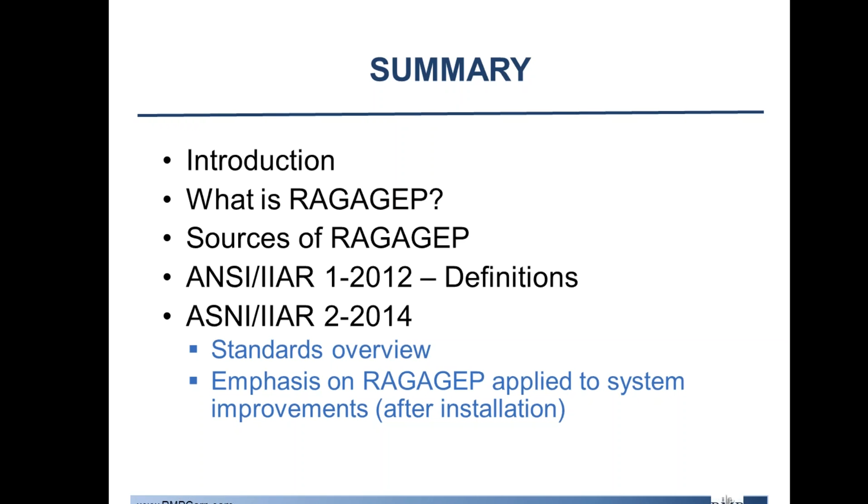There are 8 standards right now. Standard 6 is the only one not published. However, last couple days I checked, they're also going to publish a 9th standard that will be focused on RAGAGEP guidance. This is something that's new to my knowledge in the last couple months. That will help and balance out our discussions here and probably bring out what's really important for RAGAGEP for those existing facilities. Again, we're going to go through this whole thing. We're going to talk about it from a design standpoint, from start to finish, but we're going to try to focus on RAGAGEP a little bit, and it's a good way to just get a better idea of what might be missing at your facility.

So I just listed out the regulations that call out RAGAGEP: CalARP, RMP, and PSM. CCPS has a definition as well. They're, to my knowledge, the only group that has a definition for RAGAGEP. But I wanted to list these standards so that someone could reference these if need be. I won't go into the nitty-gritty, but every single standard out here is calling out the need for RAGAGEP at facilities.

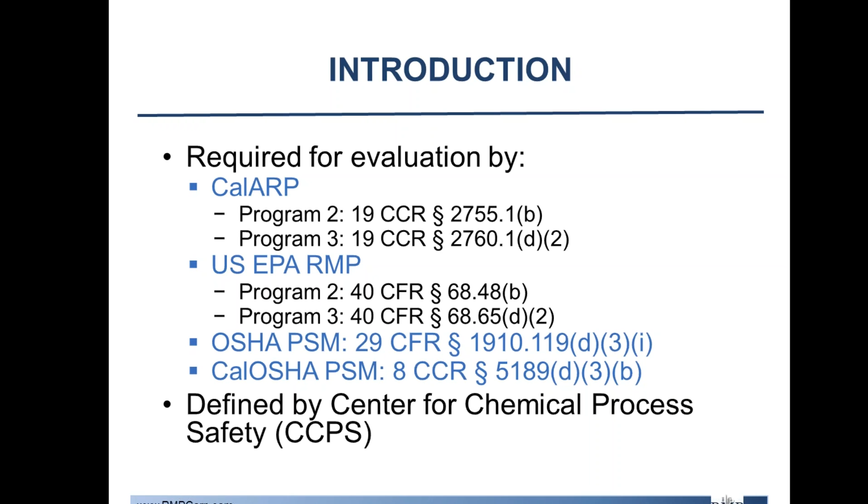RAGAGEP stands for Recognized and Generally Accepted Good Engineering Practices. It not only applies to the design of the system, but also practice and implementation at the facility and the safety culture that's there. There's a lot of segregation between the two sometimes, and it really shouldn't be. It's all-encompassing. It should apply every day, and it's a way to just have a safe practice at your facility.

I put the definition for CCPS here. I'm not going to read it, but again, it goes through everything from the design to practicing, maintenance activities, using codes to design your system appropriately. So it covers both sides of that same coin.

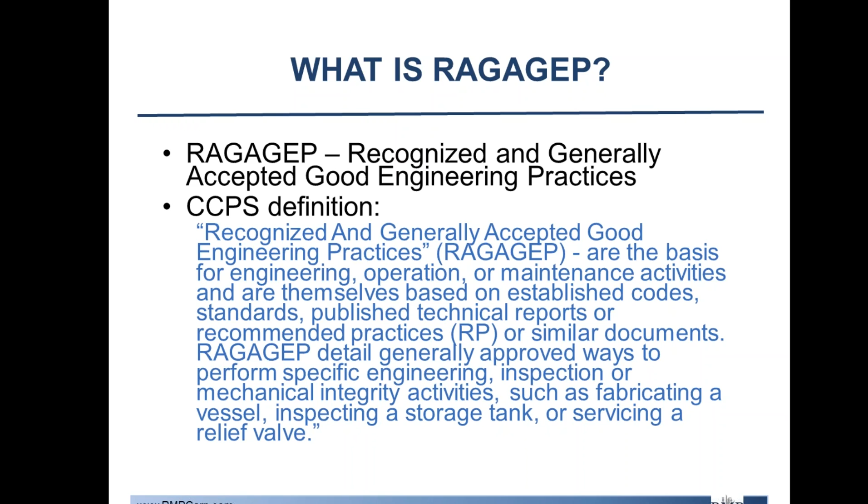For sources for RAGAGEP, they're basically published in accepted codes from federal, state, or municipal jurisdictions, like building codes, NFPA. Usually start at the local level and work your way up to federal, since local has better jurisdiction. Then you move on to the published consensus documents, and these are listed in the order that they should be used as far as authority. There are broader guidance manuals, but as requirements and guidance get more detailed, that's what really should be used.

So these published consensus documents come from organizations that are represented by committee membership. So IIAR is a perfect example, ASME, ANSI, RETA is another one that comes to mind. Any standards or guidance documents that are published, that's where these would fall into for organizations.

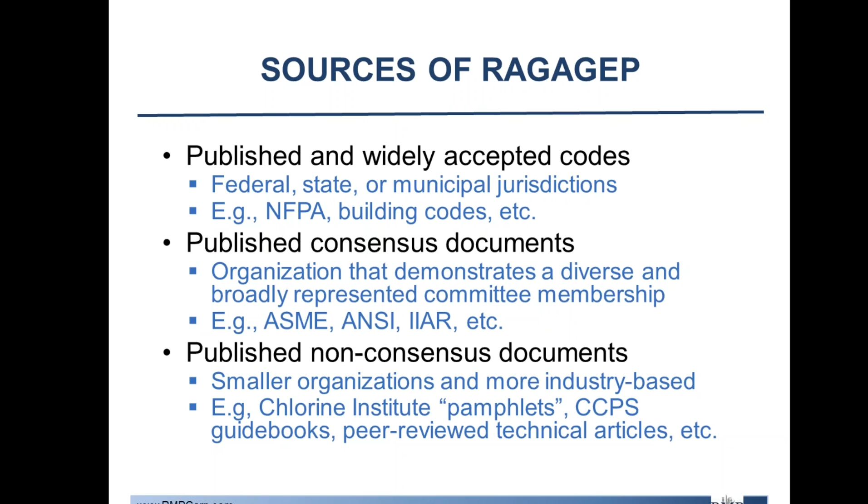And then there's non-consensus documents. So they're usually smaller organizations and more focused on a specific industry, like the Chlorine Institute pamphlets. CCPS publishes a number of guidebooks. Any kind of peer-reviewed technical articles might be like a case study or something from a larger company. Things like that bring in RAGAGEP and are important to keep track of.

So we're going to talk about ANSI IIAR 1 that was published in 2012. I'm only outlining the more important definitions. There is a full list of definitions in the standard. I encourage you to have that handy if you're looking through anything else for definitions. It's not really necessary to read through the whole thing just to know what the definitions are, but if you ever have any questions about how something's defined, that's where you're going to find it.

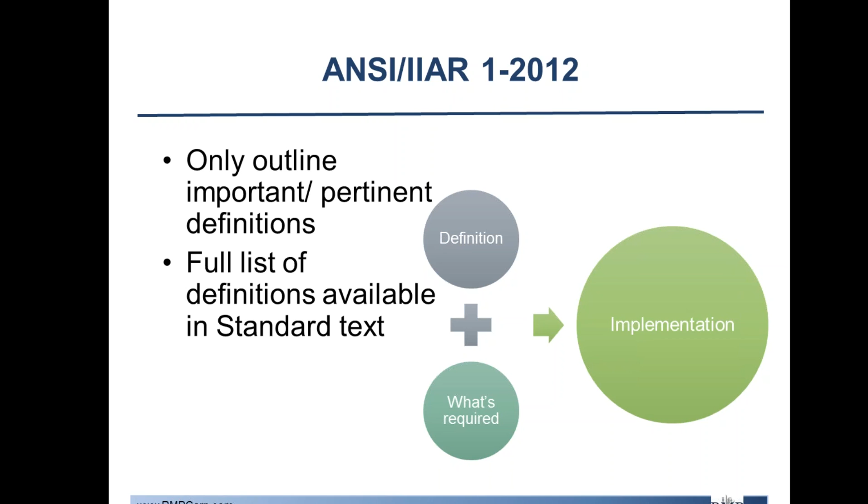It should be expected that all the definitions will move into this first part. Each of the standards still has their own definition section at the beginning. However, it looks like they're going to start moving everything to one section, the section 1, and remove the definitions from the rest of the documents. So this will be your place to go to. This is your dictionary for the standards. So we're going to take the definition, we're going to take what's required, and in this whole process, we're going to talk about how you implement all of this.

So emergency operating procedures are intended to be used under abnormal, unintended, or time-sensitive conditions. They may involve risk to health, the welfare of operators, employees, or the public, and include any of the components of the refrigeration system, or may include hazards of the product. So it's important to remember that the emergency part of that goes broader than just immediate need. It's really talking about the hazard and the fact that it's a very large hazard across a broad spectrum of things that can happen.

Machinery room is defined as an enclosed space that houses equipment. That includes compressors, pumps, liquid transfer equipment, equipment that raises the pressure of the refrigerant. And again, this is all defined in the first standard, Standard 1.

One really important definition is monitored. This is something that can be interpreted different ways, and so they've really spent time to define it, and also I have a little bit to add on to that. But monitored is a means of continual oversight, such as notification to on-site staff, third-party alarm service, or a responsible party. This means that an auto dial or a pager number may not be enough to be a monitored number.

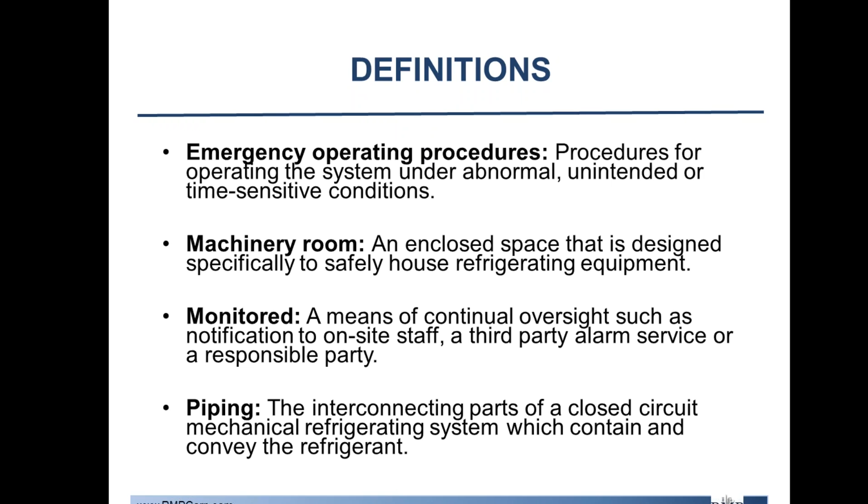Piping is referred to as interconnecting parts between the equipment and in the system. Pipes, flanges, bolting, gaskets, valves, fittings, you name it, it's there. So anything that's not what you consider your big pieces of equipment is considered piping.

Okay. Okay, we have some additional information from Tony Lundell. So the title for the Standard 9 I was discussing a little bit ago may change to application of RAGAGEP or to sustain RAGAGEP, sounds like. So they are still under a working title. That information is available on the IIAR website, but it is important to note they are still working on it and going through it. I believe it's going to go for public comment soon, so that's something to keep in mind, and thank you for that information.

So going back to definitions for readily accessible, basically that means that you have to be able to access the equipment without the assistance of some kind of access equipment, so like a ladder or something like that, and you cannot require someone to like climb over something or have an obstacle in the way.

So readily accessible really means that you can just kind of get at the equipment, whether it's a control box or a compressor, whatever it is, nothing can be in the way, no ladders. If it's a built-in ladder that can get up to a loft-type area, that is deemed acceptable. But not anything portable that you need to move around. So when the standard says that something needs to be readily accessible, that's really what they're referring to, is that nothing is in the way. It's ready to go.

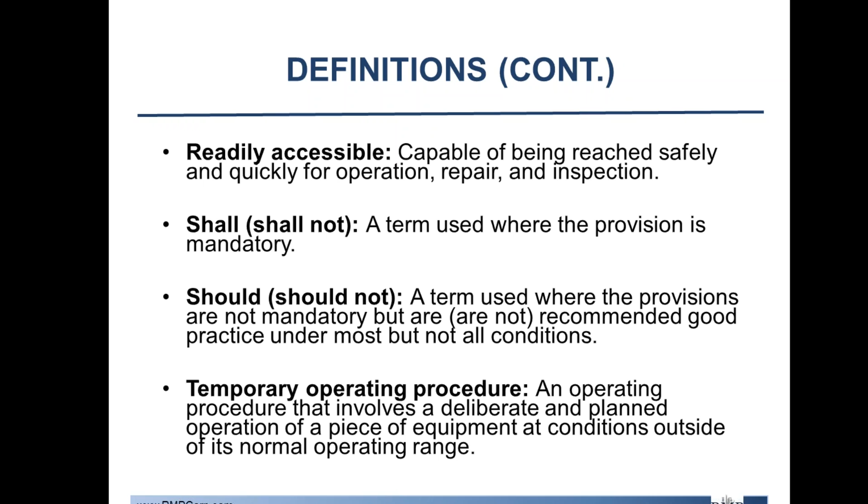Excuse me. I also want to call out the difference between a trained startup technician and a trained technician. It is possible to have someone trained in both. However, it's very important to realize that a startup technician may not be qualified, or a regular technician may not be qualified as a startup technician if they're not trained appropriately.

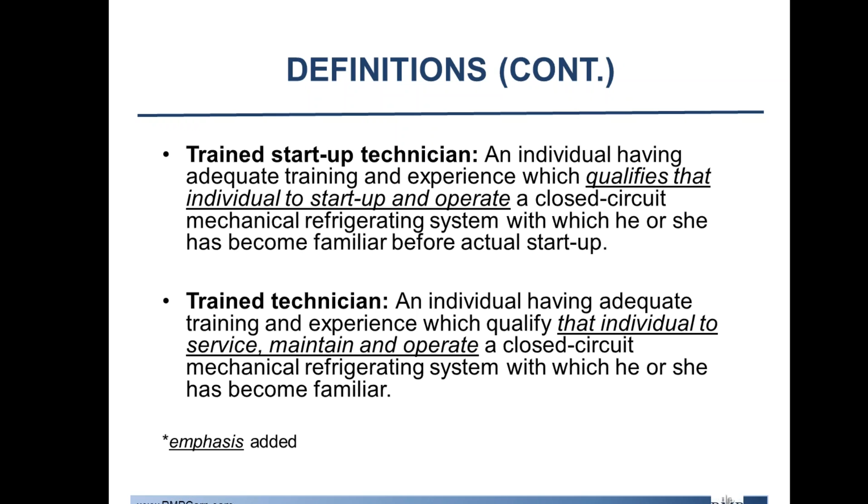The standard calls these out specifically for a reason, so to avoid confusion. And again, it's possible that someone could be trained in both, but it's important that if you have a startup technician and a maintenance technician, they're both trained appropriately. So we'll move on. Those are the important definitions from Standard 1.

Standard 2, again, I'm going through Chapter 5. The new things to note about this standard is that Chapter 2 of Standard 2 has fewer definitions than the previous edition. Again, this is going back to them moving the definitions from the individual standards into Standard 1 and having a definition standard.

Chapter 4 is new for this edition that was published, and Chapter 5 was updated for new design standards and best practice. Again, that's why I wanted to go through it. I'm not really sure the numbers as far as how many new systems are being designed. However, those same principles and applications can be applied to new equipment, upgrades to systems, or if you're just in general missing something that may be easy to fix or replace.

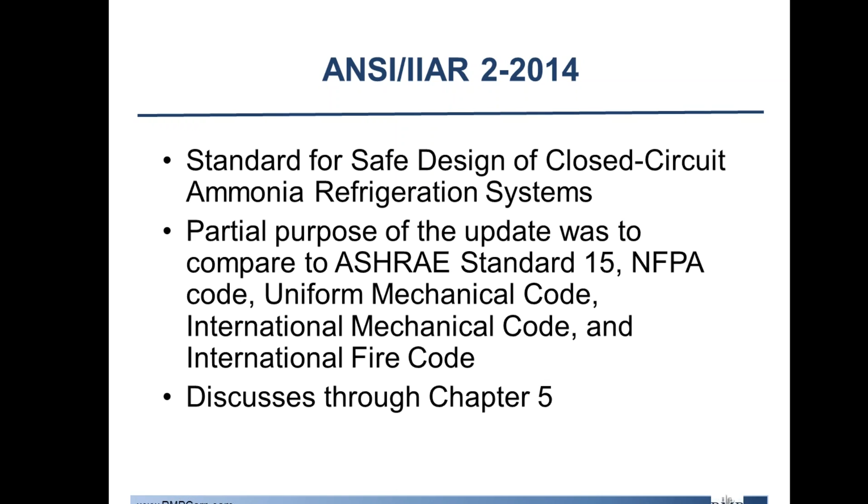So Standard 2 is designed for safe design of closed-circuit ammonia refrigeration systems. The partial purpose was to update compared to ASHRAE Standard 15 to meet NFPA codes, the Uniform Mechanical Code, and the International Mechanical and Fire Code. So to be able to integrate all of those codes together and meet all the standards. And again, we discussed through Chapter 5 on this one.

So what's new? This was published in 2014. They are now referring to these as standards. Again, like what I said probably about 10 minutes ago, the bulletins are kind of being phased out and these standards are being put in place. Both are still on the table, but the information from the bulletins is now being put into these standards and then developed and updated appropriately.

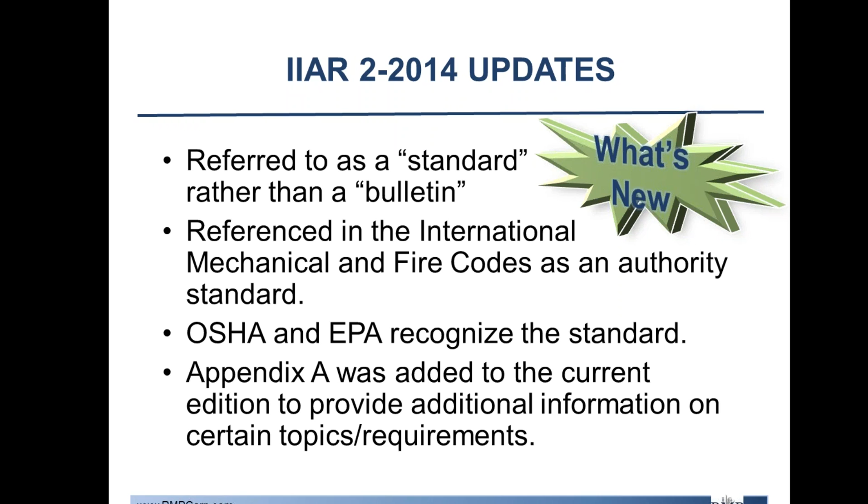These standards are referenced in the International Mechanical and Fire Codes as the authority standard. They are referenced in OSHA and EPA as a standard. And Appendix A also provides more information in Standard 2 for certain topics. In the standard, those topics have an asterisk next to them, and then there's a whole bunch of explanation in the back, usually referring to calculations or when there may be some interpretations needed. The EPA enforcement alert from February 2015 also refers to the IIAR updates as the industry standard.

Again, like I said, Chapter 2 has some definitions. I want to cover a couple of those. Most of them are moving into that first standard. And I'm skipping Chapters 1 and 3 because they're really just general information about the standard and some background information. There wasn't really much there that I felt was pertinent for this discussion. They are available to read and look at if you need to.

So Chapter 2 defines authorized personnel as someone who has been specifically granted permission to enter a restricted area. And it's important to remember that there are discussions based on someone who's authorized to enter a restricted area, and that's where this definition really comes into place. You can't just have anyone, even at the facility or off the street, coming into your facility and just walking in the machine room doing whatever they want. To be able to lock these doors, put the correct signage on things, that's where the standard is kind of going, and this is one of the definitions that's really important for that.

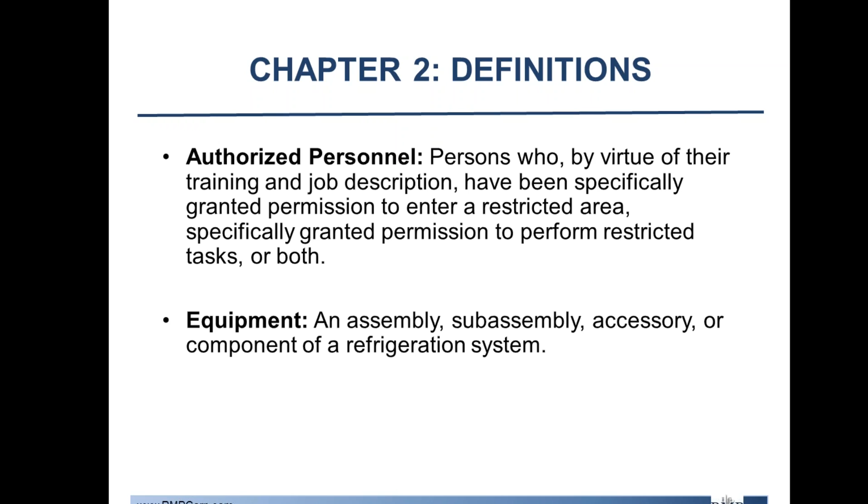And equipment, I just want to bring that up, is an assembly, a sub-assembly, an accessory, or component of the refrigeration system. So any part of the system is considered equipment. A package system is a prefabricated or pre-assembled closed-circuit system. It should contain all essential equipment, piping, and devices that are needed to run that piece of equipment. It could be enclosed or unenclosed, but again, they've defined this in the standard to make sure that everyone understands what a package system means by the standard.

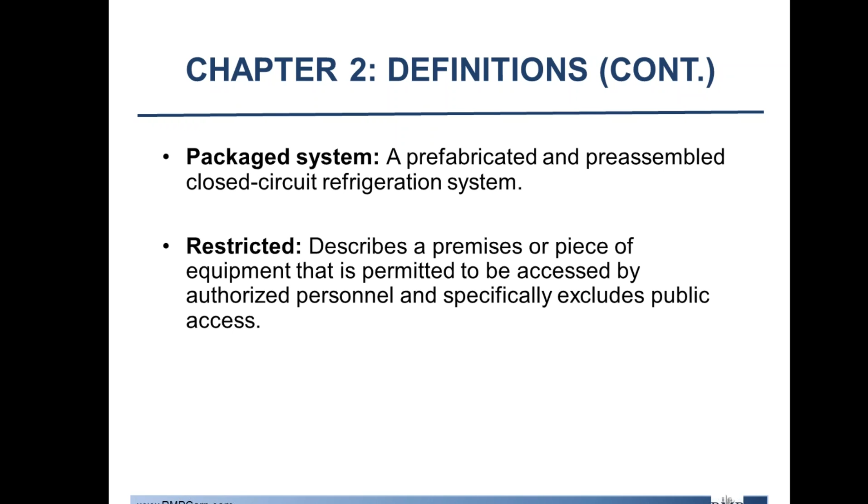Again, going back to authorized personnel, the restricted definition describes an area that is permitted to be accessed by authorized personnel only. So not public access; it's usually a locked or alarmed door, requires special access by key code or a key fob tag or whatever it is, more security. And that's really what they're emphasizing, that additional security for pertinent equipment that could cause a lot of damage or a lot of hazard at a facility for someone who may not know what's going on.

Like I mentioned before, Chapter 4 is new, so I'll spend a little bit more time on this in these next couple slides. Chapter 4, for the location of the machinery, basically all the locations should comply with Chapter 4 as far as locating machinery, which also carries into complying with Chapter 6. Chapter 6, which we won't go through today, but I'll give you a brief overview, goes through many pieces of equipment and where the locations for specific equipment are. So you're talking about compressors or evaporators, pumps, things like that.

So unless it's exempt by 4.2, which we'll go through in the next little bit, you must comply with Chapter 6. And again, we'll get to that in the next part of this series. So this should be kept in mind for equipment upgrades, that some equipment can be housed outside the building. And they do give you some standards for that, and that's going into Section 4.2.

That equipment includes evaporators, condensers, low probability pumps, valves, and compressors that do not exceed 100 horsepower. So if you have a low horsepower piece of equipment, you can put it outside for an industrial occupancy.

For a public assembly, commercial, or mercantile occupancy, you can allow for machinery outside if the complete discharge of ammonia will not exceed 300 ppm. So if you have a relatively small system that, even if you discharge the entire volume from whatever piece of equipment we want to locate outside, has a target concentration less than 300 ppm, you can locate that outside, given you meet the occupancy categorization here as well.

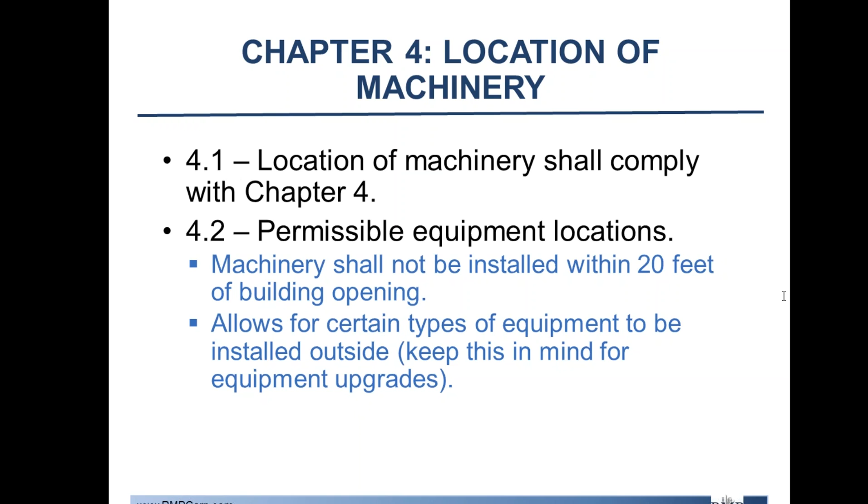With those exceptions, if there's equipment outside, they cannot be installed within 20 feet of a building opening. And again, we went through certain types of equipment outside. So for smaller systems, maybe upgrading to fewer pieces of equipment, downsizing a facility, building a new facility that may be a little smaller, these are things to keep in mind: there's some equipment that can be located outside, maybe saving you some room inside for a facility and warehousing.

Chapter 5, the general system design requirements, is going to be the rest of our discussion. We're going through Chapter 5, and we'll stop there. It's plenty of information for this morning. I'm hoping you all had your coffee, because it'll take us a little bit to go through. I'm going through this basically section by section. I'll cruise through some of the easier sections, or ones where you just have to look up the information in the standard. Other ones I'll spend a little more time on.

So section 5.1 is just talking about how the ammonia refrigeration system has to comply with this chapter. Section 5.2 talks about the specifications for ammonia. So it talks about purity, quality of ammonia, and what's required to use in a closed circuit system.

Section 5.3 is discussing calculating the concentration for ammonia release. The additional subsections, 5.3.1 through 5.3.4, talk about guidance on wall openings, suspended ceilings, interconnected floors, and ventilation considerations. And if I remember correctly, this is also a section marked with an asterisk. There's more information in Appendix A. So if you're doing these calculations, or if you want to verify any calculations, this is where you want to go.

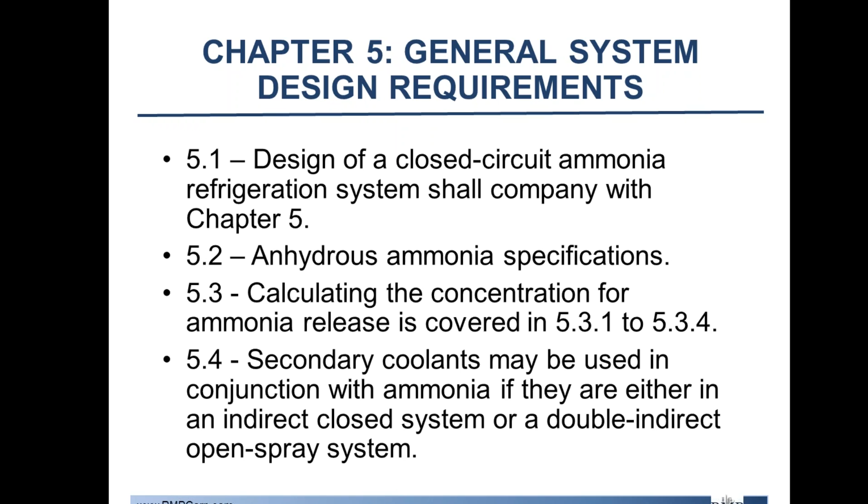Section 5.4 talks about secondary coolants, that they can be used with these systems as long as they are an indirect closed system or double indirect open spray system. And again, those definitions are also in these standards. I just didn't call those out. That's a pretty general requirement.

Section 5.5 starts talking about system design pressure, and the first subsection is just general information. It talks about the allowance for setting pressure limiting devices and pressure relieving devices to avoid shutdown. So you don't want to set your pressure relief at the same set point that your equipment's rated at. You want to give yourself an allowance so that PRV is going off before you lose your equipment and damage it. That's the whole intention of these standards, safer operation.

All equipment in connection with each other should be designed at the same design pressure or greater. Basically they're trying to eliminate a lower design pressure unintentionally, or an area where you may lose a piece of equipment and have a weak spot.

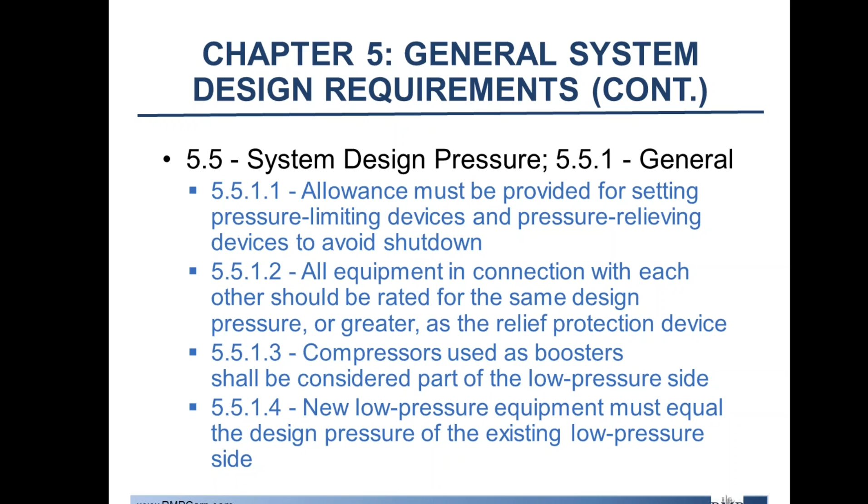Compressors used as boosters are considered part of the low pressure side. They wanted to define this to make sure everyone's on the same page for design standards. Low pressure equipment must equal the design pressure of the existing low pressure side. Again, you can't bring in something that's rated lower than an existing piece of equipment. Everything should be on the same pressure rating, basically at the same safety level that the rest of the system's at.

Section 5.5.2 talks about how to determine what the maximum design pressure is. Basically, you're looking at the pressures during operations, pressures during a standby situation, and pressures during shipping, if there's anything shipped within the unit. Taking all that into account, that's where you really find your maximum design pressure. So I put the actual statement here from the regulation.

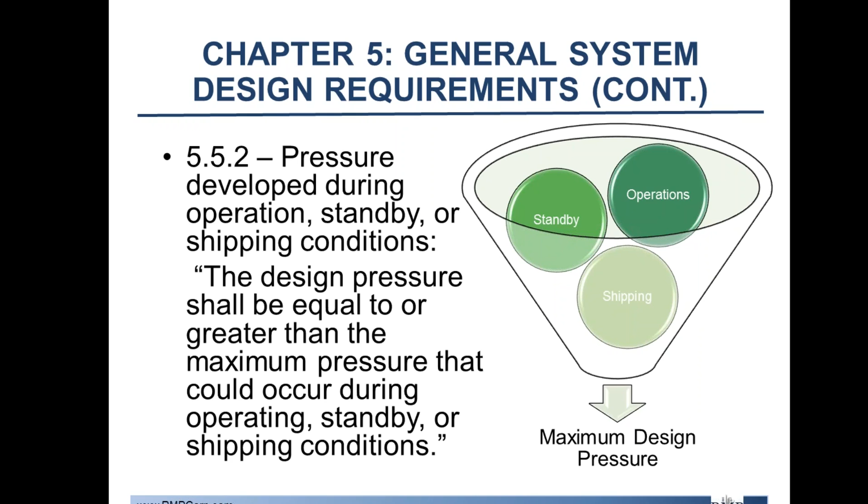Any of these conditions may include fouling of the heat exchange surfaces, where you may see additional pressures. It could be conditions when the system may not be in operation. Again, you're talking about standby, maybe a turnaround where you have higher pressures somewhere in the system. Also looking at the highest temperature of exposure. If you have piping on a roof or equipment outside, it's raising the temperature of that ammonia possibly, or maybe you have another area where there's high pressure and high temperature of ammonia. You need to take into account all of this information, and then maximum design pressure should come from all of that information put together.

The design pressure shall meet the following requirements. I won't read through this. I put this here so it's an easy reference. But basically going through low side and various high side requirements as far as where you get your design pressure from at minimum. So not only do you look at this, but you also look at where the operation levels are. You're kind of taking a lot into account and making sure that, again, everything is in safe operation.

You're designing your system to withstand all the normal conditions, whether it be temporary operations or emergency shutdown or whatnot. All the conditions that could happen and that system could be considered quote-unquote normal, to be able to use that maximum design pressure to make sure everything's going to run okay. And equipment shall be designed for 29 inches of mercury as well.

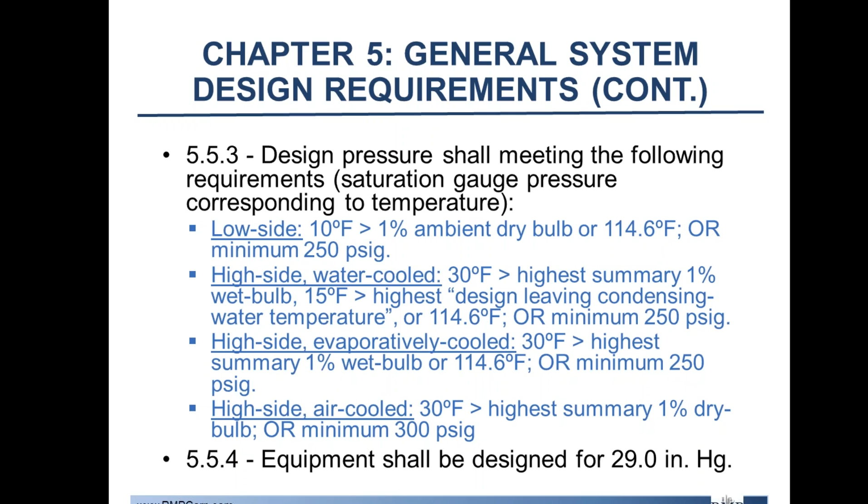Section 5.6 talks about the equipment should be designed for a full range of temperatures. This includes system and ambient temperatures. Again, going back to equipment outside, piping on the roof, perhaps you're an ice cream facility and you have freezing conditions inside. All the highs and lows, wherever your system's exposed to, they all need to be taken into account.

For materials, it specifies that any materials used in the system should be suited for contact with ammonia. That kind of goes without saying, but again, they've defined it here. And also that materials that deteriorate in the presence of ammonia or oil should not be used. Again, going back to just safer operations to make sure all the checks and balances are there. And I know these systems are pretty standard and everyone uses kind of the same thing, but again, going through and making sure that everyone knows what's required.

Sections 5.7.2 and 5.7.3 talk about the acceptable and non-acceptable metallic and non-metallic materials that you can use. It's a semi-general list. There are some specifics. I didn't want to list everything here, but they are available to look at if needed for equipment upgrades or whatnot.

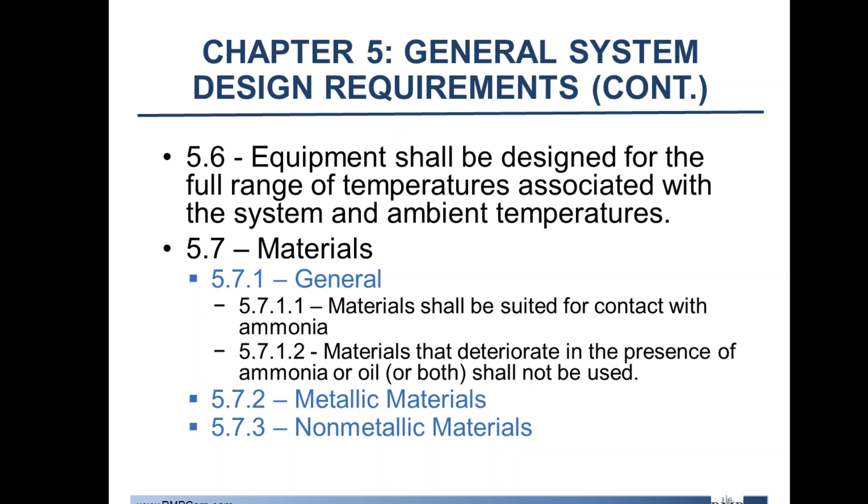5.8 talks about the ability to purge non-condensable gases from the system. Again, a lot of facilities are already taking care of this. This could be an area of RAGAGEP if you don't already have a means for whatever reason. It does not specify what means. However, that may be covered in a later chapter. I haven't quite got there yet. But it does say there has to be a means to purge the gases.

For oil management, there must be a means to remove oil. The compressors should have a means for sampling oil. The oil removal can be accomplished by a number of ways. It could be a rigid oil piped return or transfer system, vessel equipped with a shutoff valve in series with a self-closing shutoff valve, or a valve and piping assembly at the draining point with a shutoff valve in series and a self-closing shutoff valve. So basically having your shutoff valves, dead man valves, again, dual safety measures, but a way to remove oil safely or as safe as possible from the system.

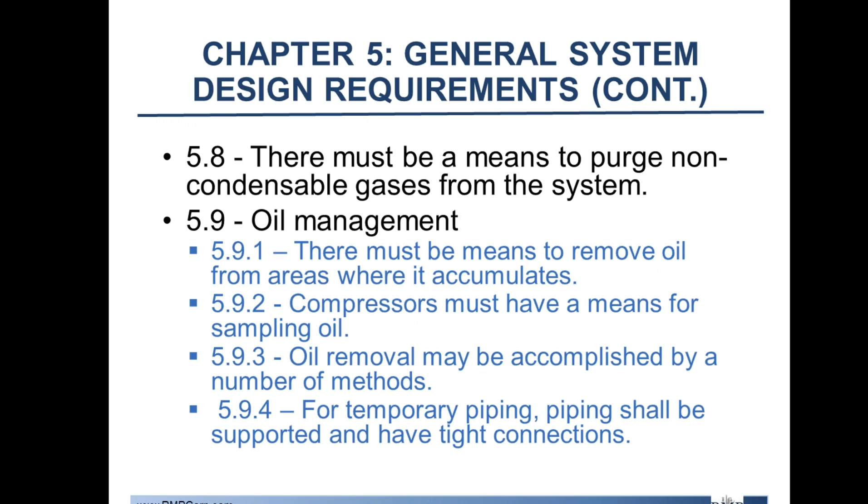For temporary piping, that piping must be supported and have tight connections. That kind of goes into building codes and whatnot, but just in general, they put it here as well. Talking about insulation, insulation is required for the mitigation against condensation and frost buildup. There are some exceptions to that. Uninsulated pipes for service are allowed, provided that the vapor retarder is sealed. And if piping or connections are routinely defrosted, pipes may be uninsulated, so you're really referring to evaporators. But a means of control to drain the condensate has to be provided. So you have to be able to get that water out of there.

For foundations, piping, and tubing, this goes a lot into building codes and supports. Supports and anchorage, first subsection. Supports and anchorage must meet building code standards. That's going into your civil design, structural design, and being able to make sure that you're not going to have bending pipes or something breaking, sagging, whatnot. Structural supports must be non-combustible. Again, referring to the building code in regards to seismic joints and restraints. Make sure that's seismically sound. That also goes in for California into your seismic assessment. That gets looked at there as well.

So you can start seeing the overlap between all the different requirements, that if you meet the requirement one place, you're probably meeting it somewhere else. You just have to make sure you do your checks and balances.

Supports and foundations meet or exceed manufacturer recommendations. Skids are in place; usually it's easier just to bring them from the manufacturer. Your foundation for your building will support that. Things like that need to be taken into account. And also vibration analysis needs to be taken into account. Doing your vibration analysis and also making sure that the supports and foundation can take some kind of vibration as well.

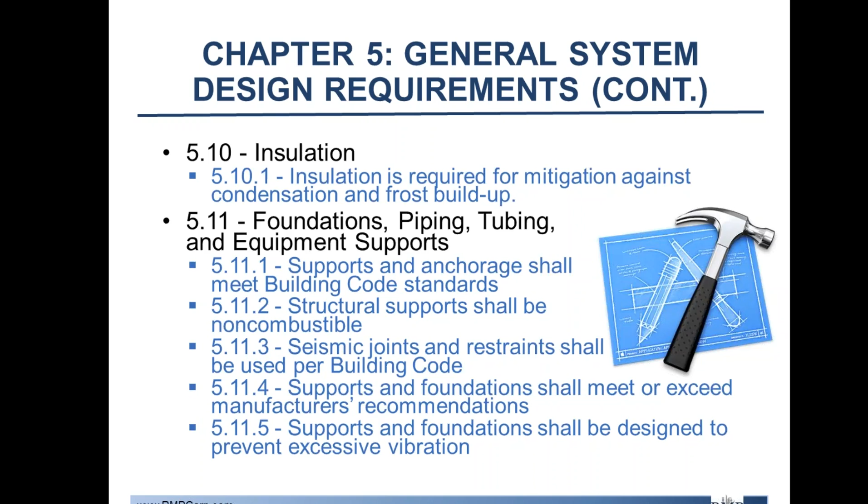This goes into 5.12, starts going to service provisions. For instance, equipment shall be accessible for maintenance. And this also goes into readily accessible as well. Can your maintenance staff access the equipment without moving a whole bunch of stuff out of the way, without grabbing a ladder, maybe in an emergency situation to shut off a valve? Any essential equipment should be readily accessible, and that's really important to remember.

So emergency valves, stops, pertinent valves that may be used to close off the system at a certain point, those should all be readily accessible, going back to that definition.

Charging connections should be plugged or capped and marked as restricted use. So locked, maybe the valve is locked, the cap has a lock on it, a good label on it, whatever mechanism works for the facility, that's really called out here. Since that charging connection is going to be opened and closed, it needs to be restricted access. It's usually because it's also easily accessible by just about anybody unless you have some kind of restrictive access on it.

The design shall provide for maintenance, functional testing of safety controls. So again, going back to making sure that your maintenance staff can be able to access all this equipment. That also means not climbing over equipment. It's easily reachable, convenient locations for things. Again, going into that readily accessible definition, even though it's not called out here, that's really what they're talking about.

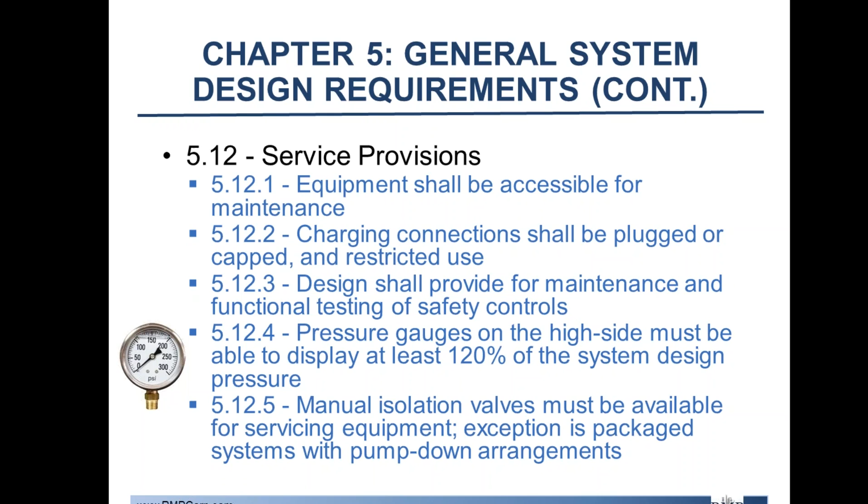Manual isolation valves must be available for servicing equipment. Same thing, everything needs to be accessible for maintenance. It's got to be easily and readily available.

For testing, this goes into a lot of the ultimate strength testing. And a lot of this comes from the manufacturer, but as an owner and operator, you should always be reminded that you're still responsible. The manufacturer can make a mistake too. So double check that everything's been tested appropriately, that the minimum testing pressures have been reached. ASME has a lot of jurisdiction over this as far as what the design is, what they should be tested for. You could start getting into some API standards as well.

But basically, your pressure vessels must be designed and constructed to have ultimate strength sufficient to withstand 3 times the design pressure. That's what's called out in the regulation. And that section, if you want to write it down, is 5.13.2.1. So it is in here, and I do have the actual code in front of me. But that's kind of where we're going with this.

And again, the manufacturer does a lot of this, but it's always good to check your equipment, check that you get all the right forms and the testing and everything else. For pressure vessels, piping, gauges, pumps, and control mechanisms, that's 5.13.2. They really have to meet the specifications of Chapter 8 through 16.

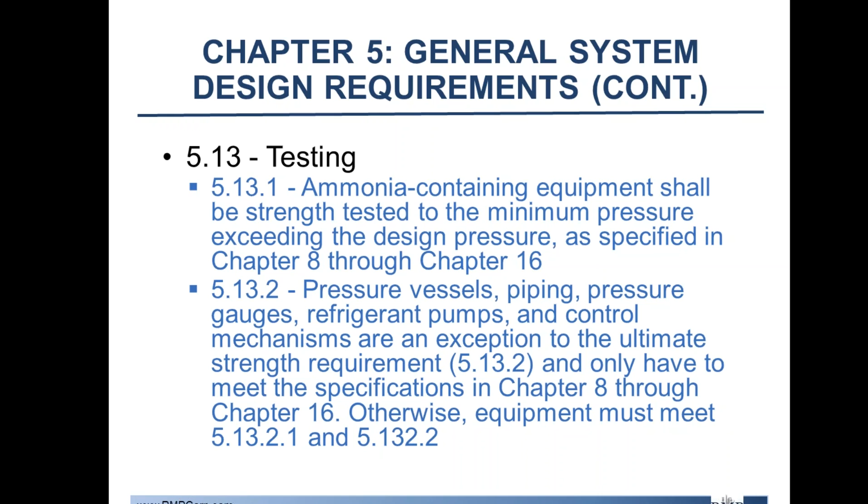What they need to do is meet those 2 subsections listed there, 5.13.2.1 and 5.13.2.2. And I'm going to start tripping over these numbers pretty soon here. But go read it. Again, if you're not designing a new system, you should be okay. It's good to double check. You have your references in front of you.

Let's talk about signage. Machinery room signage is actually covered in pretty good detail in section 6.15. Excuse me. That should be the next part of this series. So we'll go over machinery room signage specifically later. In general, caution signs for your ammonia system, the safety diamond being posted in areas where it's pertinent. That's kind of what this standard is getting at under the general terms, making sure that things are labeled.

All refrigeration machinery should have labels on them. They should have the equipment call-outs that should also match your P&IDs. Can't tell you how many times I've seen that they don't match up, and they always should match up. Multiple names for things. If the operators are calling a piece of equipment something, but it's different on the P&ID and it's marked different on the piece of equipment, that's not really easy to use. Make sure if that's the case and you have 3 names for one piece of equipment, all 3 names are in all 3 places, and everyone knows what you're talking about.

It's really important. Also, any valves required for emergency shutdown should be clearly marked and identified, and that includes the drawings. The guidance on this is, paint the valve red or put a big red sign on it that says emergency valve and the number of the valve. On the P&IDs, color-code it a different color. If you're using AutoCAD, just move it over to a different layer, and you should be able to change the color of that layer all at one time.

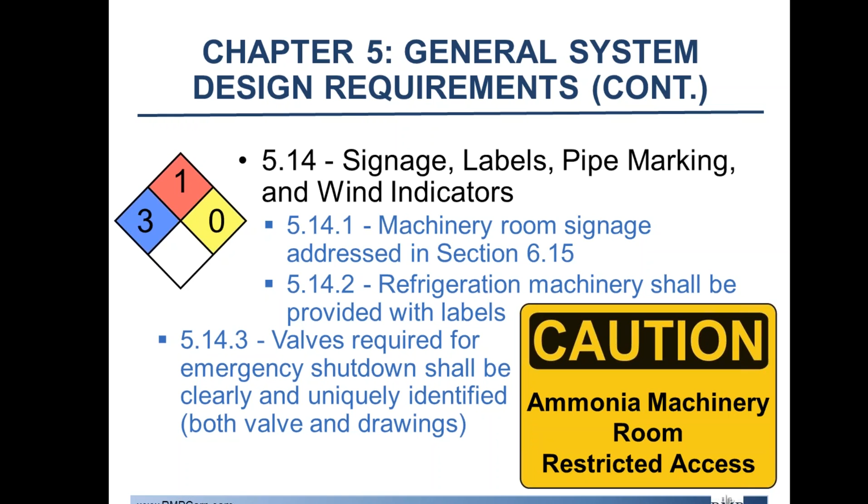Nameplates. Nameplates really come from the manufacturer. There's not much an owner-operator can do other than double-check the work and make sure everything's there. Each piece of equipment should have a nameplate with the manufacturer's information and design limits. These are more specified in chapters 8 through 16. We'll go through that. This information carries into your PSI.

So if your nameplates are faded and you don't have the PSI either, how is anyone supposed to know what this equipment is rated for? So it's really important, especially if it's a new piece of equipment, take a picture of that nameplate, put that information in a table somewhere so you can find it easily, or in your PSI section, it should be in there as well. And that way, if that nameplate fades over time, you still have something to go by. And you can reorder these nameplates, but you have to go to the manufacturer to do it.

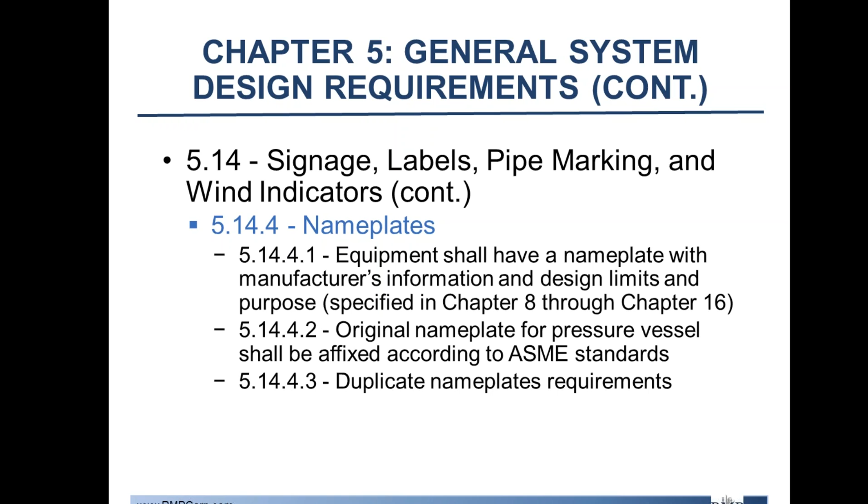The original nameplate for the pressure vessel should be affixed according to ASME standards. One of the subsections goes over duplicate nameplate requirements. Again, going through ASME standards, where they should be installed, the nameplate should be marked duplicate. It needs to be obtained from the original manufacturer or assignee. So all these things come into play. So if you need duplicate nameplates, go see this section on nameplates, and it'll give you all the details of what's required.

Ammonia piping signage. This is a big one because I'm sure some of you out there have changed your signage and maybe mixing systems between the old requirements from the bulletins and the new requirements that are listed here, which are not allowed anymore. So if you are using the old standard for your piping, your pipe markings, that's fine, but you need to document it as a facility standard and what you're using for that standard. A copy of the bulletin, and that's what those requirements are, fine, as long as you're meeting them. But it must be documented as a facility standard.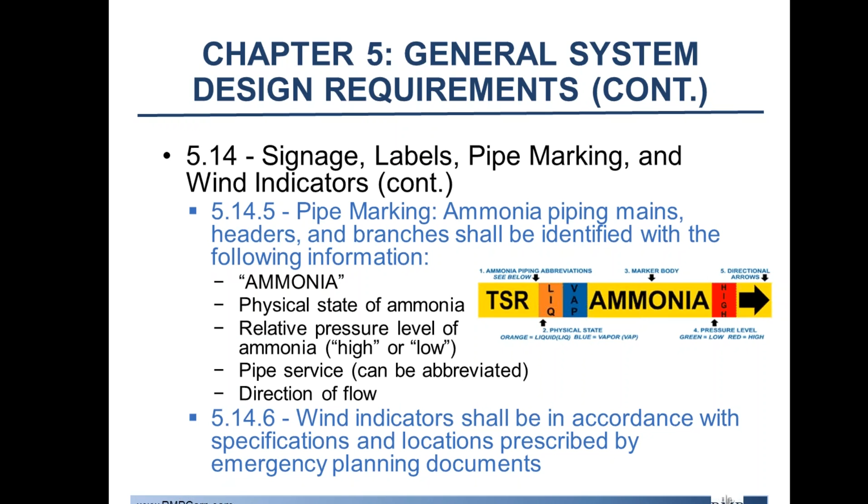Emergency shutdown. All directions for emergency shutdown should be provided where it's readily accessible to trained staff and responders. Again, going back to readily accessible. It can't be hiding on a bookshelf somewhere, hanging it somewhere by a door with like a little letter holder or something. Having it in someone's specific office in a specific location or a drawer or something that you can just grab it and go. Again, you got to remember in an emergency, you're going back to basic knowledge and everything needs to be ready to go, readily accessible.

I always say for emergency plans, put the pertinent phone numbers on the front cover. That way they're right in front of you. There's no mistaking what they are. And make sure they're updated. So the drawings and signage for emergency shutdown are listed there. I'm not going to go through everything, but it basically follows what an EAP or ERP should have in it. I know some of the standards aren't as detailed as this is here, which makes this a nice reference.

But in general, phone numbers and who to contact and the quantity of ammonia on site and maps and any kind of test pressures that are applied and what's going on with the system that may be important in an emergency, that all should be documented in the emergency shutdown directions. And again, that can go with your EAP as well. This also ties into providing direction to trained facility staff, emergency responders, and coordinating with your local emergency responders. Again, everyone's got to be on the same page for safe operation.

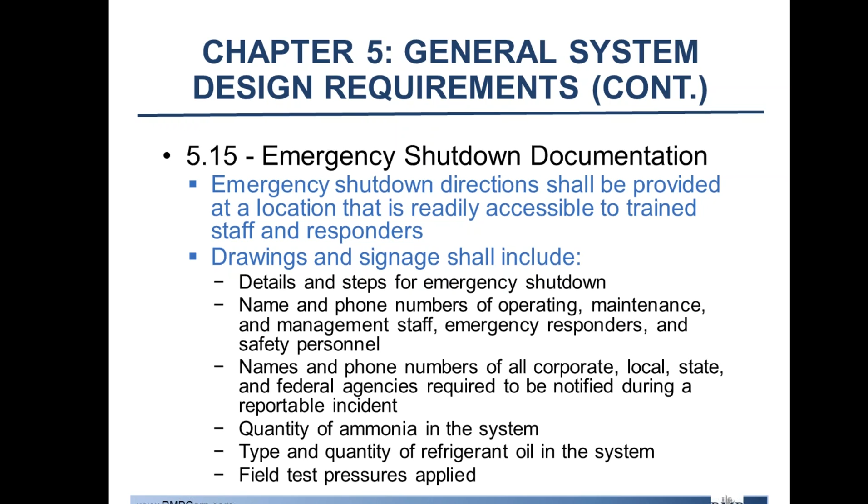For equipment enclosures, basically the enclosure should be suitable for whatever you're using it for and providing protection from physical and environmental damage. There should always be an egress by access panels or doors unless there's some remote service. So it's a bolted system and everything's done by controls. Guarding and barricading is also covered. Going into guards for moving parts, barricades for any equipment that could be hit by a truck or a forklift or any other piece of equipment, and also storing ammonia properly in a proper containment.

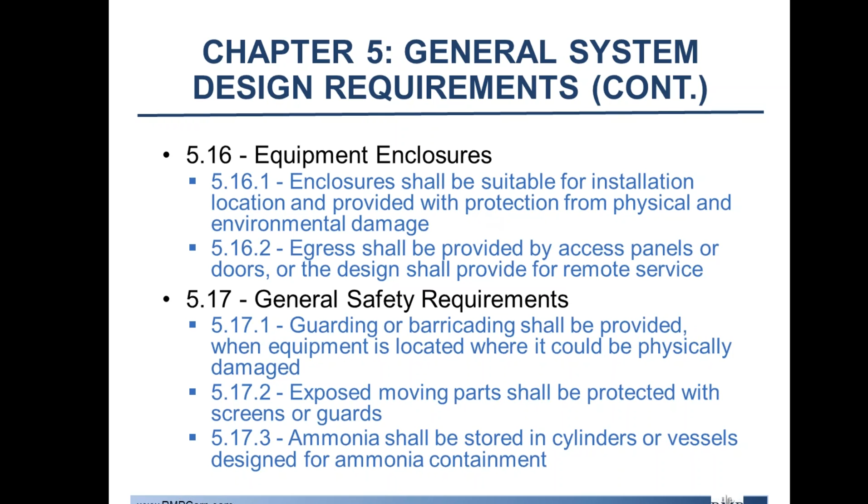There we go. Did I skip one? Nope, I didn't. Okay, I'm sorry.

For used equipment, basically complying with all the standards that were used during the original system. So at least, if not newer standards. So not reverting back to old practices that may be outdated. All equipment should be designed to withstand the static and dynamic loads that are anticipated. Going into illumination requirements for lighting. And that's also covered by a number of OSHA regulations, I'm sure.

A means of egress, complying with building code. Again, going back to safe operations, emergency, access to things. It's all coming into these general safety requirements. 5.17.8 talks about refrigerant piping requiring signs, insulation, or guards to prevent contact.

This applies to piping with an external surface temperature of 140 degrees Fahrenheit or higher that is located outside the machinery room at a height less than 7¼ feet above the floor, or anything located adjacent to passageways, aisleways, or walkover stairs. So anything someone could come in contact with, that height requirement is over 7 feet. At very hot temperatures, they need to be labeled so that someone doesn't accidentally put their hand on a hot piece of pipe or something like that.